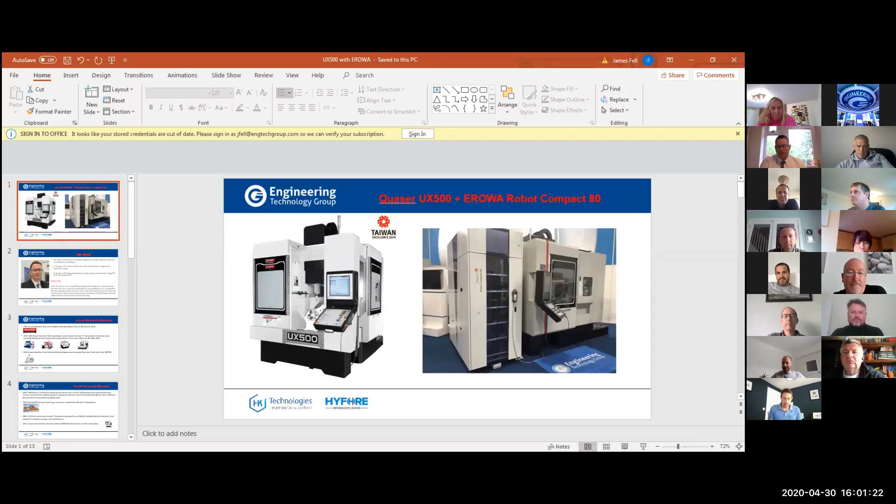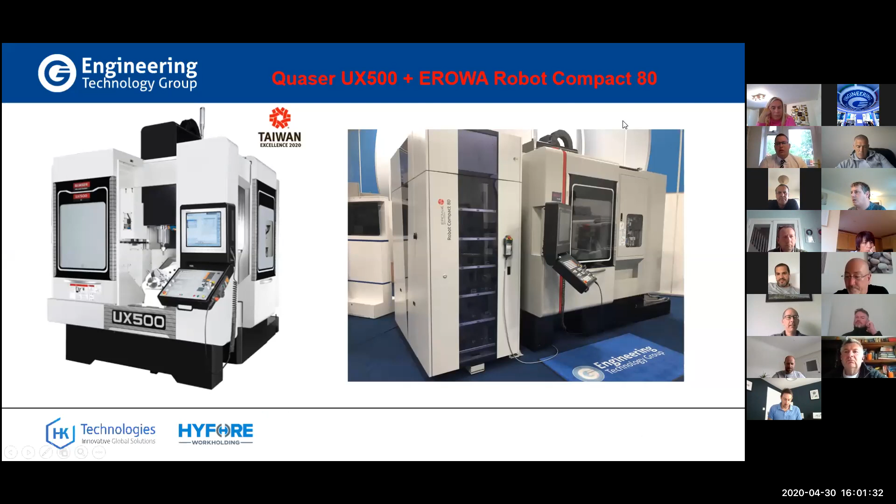Right, as Steve said, I'm going to be talking about the Quaser UX 500 this afternoon with the EROWA Robot Compact 80. Just before I talk about the machine, I want to introduce myself. My name is James Fell, I work for ETG on the machine tool side of things. I left school at 16 and went into an engineering firm called Solent Mold Tools as an apprentice. At 22, I started my first sales role as a technical sales engineer for Mitsubishi Carbide, and at 26 I began my machine tool sales career, joining ETG at the start of 2019 at the age of 28.

Why ETG? From the very first day I visited ETG and spoke with the directors, I understood that the ethos and the sheer range of products made it a very exciting place for a young man like me to develop and be successful in his career. Since joining, I've only cemented that in my own mind as I've witnessed the acquisition of HK Technologies, and now with the release of the exciting new Vulcan range, I think it's fair to say we've got some exciting times ahead.

A little bit about Quaser. They were established in 1991 by Mr. Edward Shar and Mr. Samuel Shieh - apologies if I've mispronounced that. From 1992 to 2000, Quaser Machine Tools developed, released and sold their first generation of machine tools, including horizontals and vertical machining centres. These were called the MV, which we still sell to this day, the MK and the MKH, and you can see photos of the original machines underneath.

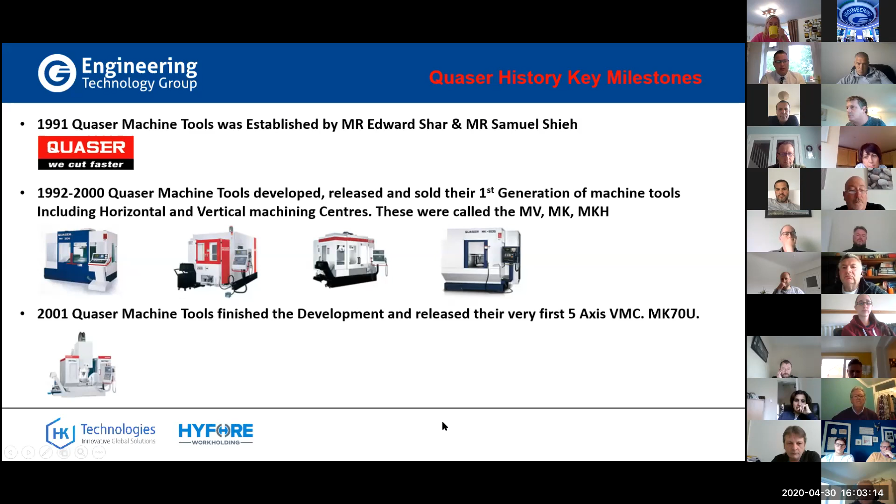In 2001, Quaser Machine Tools finished development and released their very first 5-axis VMC, called the MK70U, which you can see a photo of underneath. Between 2002 and 2009, Quaser continued to develop and release new variants of horizontal and vertical machining centres, winning multiple awards including the National Award for Outstanding SMEs, and were ranked in the top 1,000 for manufacturing worldwide, which is quite an accolade for the company at the time.

In 2009, the Quaser European Technology Centre was established officially in Switzerland - there's a picture of it underneath. Between 2009 and 2018, Quaser saw continuous growth. They were also approved as an ODM for multiple big brand machine tool suppliers throughout Europe, Asia, and America. A lot of you will recognize some of those brands, the big ones being the green and blue guys.

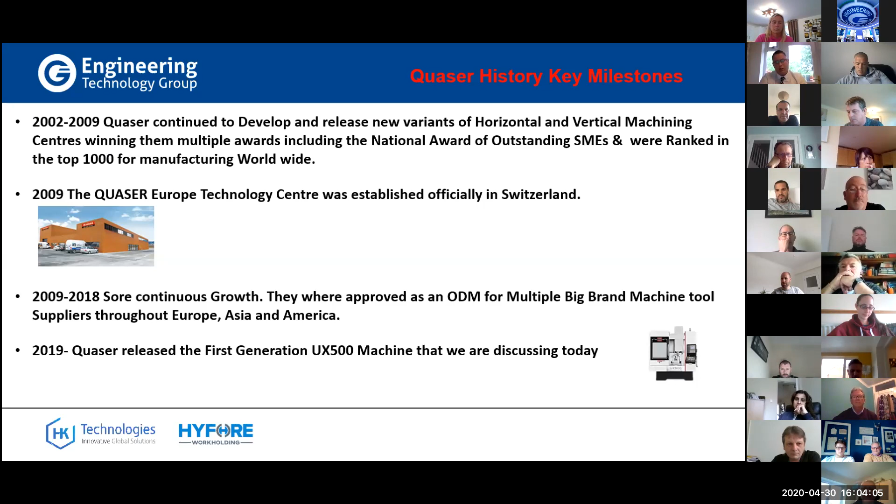In 2019, Quaser released the first generation of the UX 500 machine that I'm going to be discussing with you today.

So I'm going to go through some key features and the benefits of those features. It's a 5-axis machining center, so with that comes 5-axis machining capabilities. The benefit is the ability to machine more sides of the component in one operation. This saves you time both on the machining and also loading into complicated and sometimes expensive fixtures, ultimately saving time and money. Also with the 5-axis capabilities, you can complete the machining of complex contours and shapes using all axes combined.

You can see some examples underneath there, some a little bit gimmicky, others a bit more serious. On the far right, you can see this is actually what I worked on in my apprenticeship - you can see the Coca-Cola mold there, which will be used to manufacture Coca-Cola bottles.

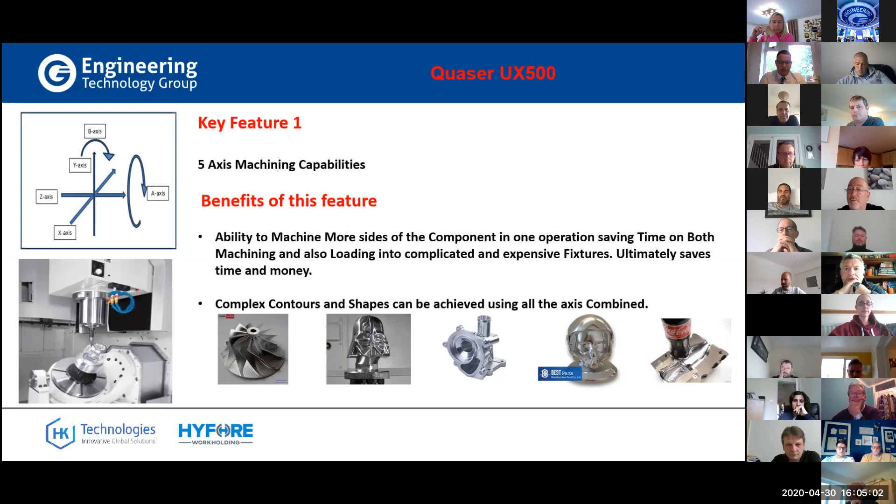Second key feature of the UX 500 is its large working envelope and heavy table capacity with a small footprint. You can see below some of the axis ratings: 712 in X, 508 in Y, 515 in Z, with a max table weight of 250.

In that category of machine tool, we are industry leading against the competition. The benefit of that is space is expensive in the UK, so compact footprint machine tools are very sought after. It ultimately allows customers with limited floor space to produce bigger and heavier components, giving them a competitive edge over their competition.

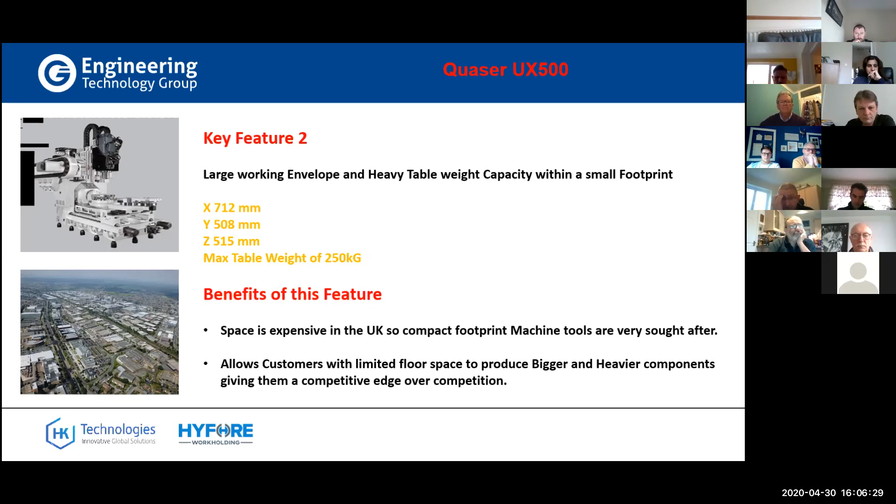Third key feature of the Quaser UX 500 is the industry-leading spindle technology they use. We bring our UX 500s in with a 15K direct drive high torque spindle, built by Maxia, which is a very well known and respected spindle brand within the industry, offering us confidence in the machine, and ultimately the customer confidence in the machine. Its high torque mixed with high RPM makes for a very versatile and user-friendly spindle, meaning you can accommodate all types of machining and materials.

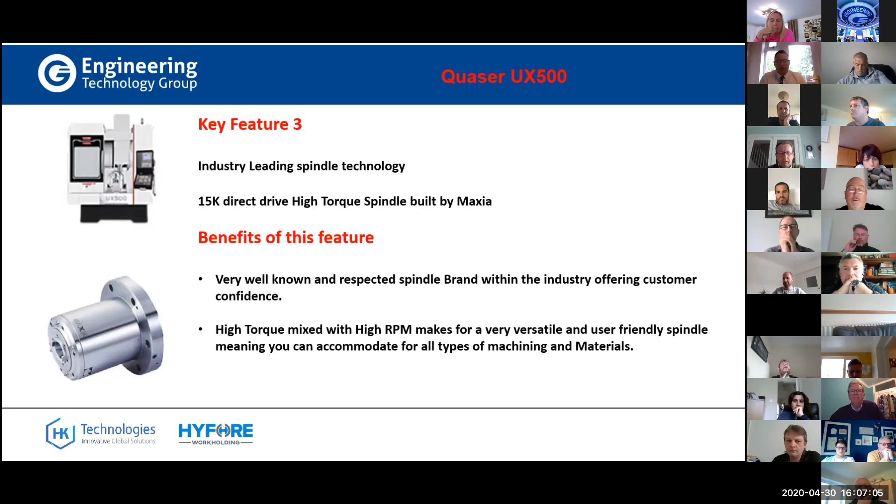Key feature number 4, moving more onto the robotic side of things now. The EROWA robot systems can be customized to suit any number of sizes and variations that you require. This has multiple benefits, one being that different jobs can be set up at any one time, meaning you can continuously run smaller batch sizes, utilizing auto part probing and large tool carousels within the machine.

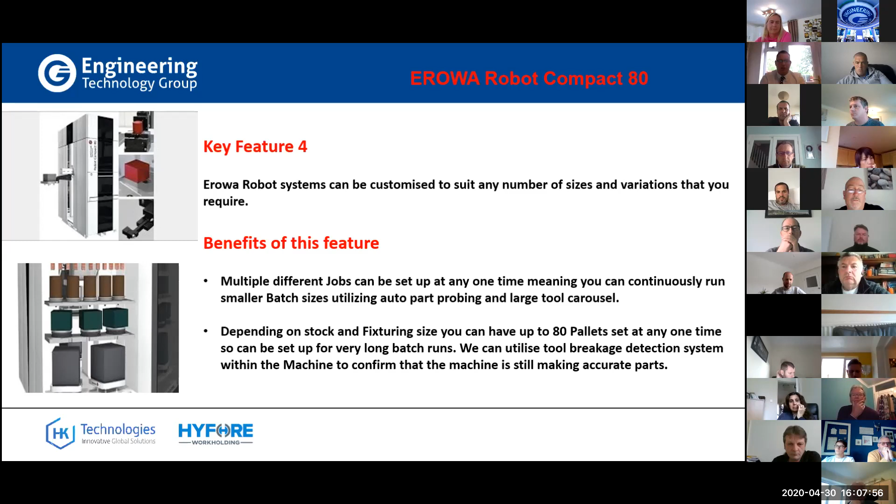The maximum tool carousel on the UX 500 is 60. As you go up the UX range, with our bigger machines, you can go up to 90, but on the UX 500 we're talking about today, it is 60. Depending on stock and fixture size, we can accommodate up to 80 pallets set at any one time, so it can be set up for very long batch runs. We can utilize the tool breakage detection system within the machine to confirm it's still making accurate parts for those long batch runs.

Key feature number 5. Sorry if everyone just heard my daughter screaming in the background, she's just come into the room.

Key feature number 5: one robot can be used to load 2 machines positioned next to each other. As mentioned before, with space being such a premium in the UK, having the ability to load 2 machines with one robot gives Erowa a competitive edge. You can ultimately double your throughput using 2 spindles to do the same job instead of 1.

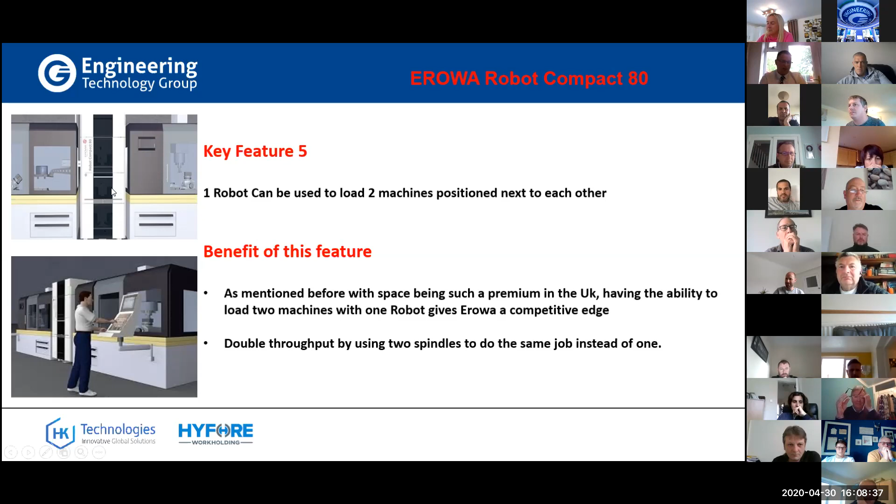I couldn't actually find any pictures of a Quaser set up with one robot in the middle, but you can see there that gives you a good idea of what we mean by 2 machines and 1 robot. A little video now of the actual setup that we're talking about.

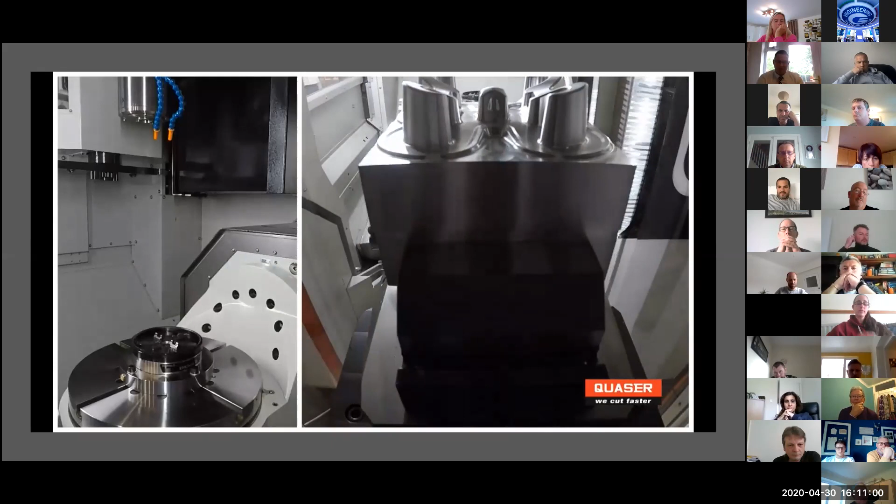There you go, that just gives you an idea about how the machine runs with the Erowa pallet loader. Thank you all for listening for the 10 minutes I've been on here. Any questions are welcome.

Brilliant, cheers James, that's a good insight. I like that, I like the Quaser video, I've not seen that one before. That was taken at EMO, so yeah, at EMO when it was released. Yeah, you've done well to dig that out. If we can start the questions firing through on the chat down the bottom, I'll start things going for you.

So with you guys being at the coalface in front of all our customers, how is automation being received? What's the level that people are discussing with you in terms of automation now? Automation is included in every single conversation we have now around machine tools, in some way, shape or form, whether it be a bar feed or a robot loader. With the shortage of skills and the sheer number of people not machining in the UK, it's important for customers to utilise automation in the best way possible, and they are really buying into it now. The payback from a machine with an automation unit attached is far superior to without it. Ultimately, to have a guy standing in front of it instead, that's huge.